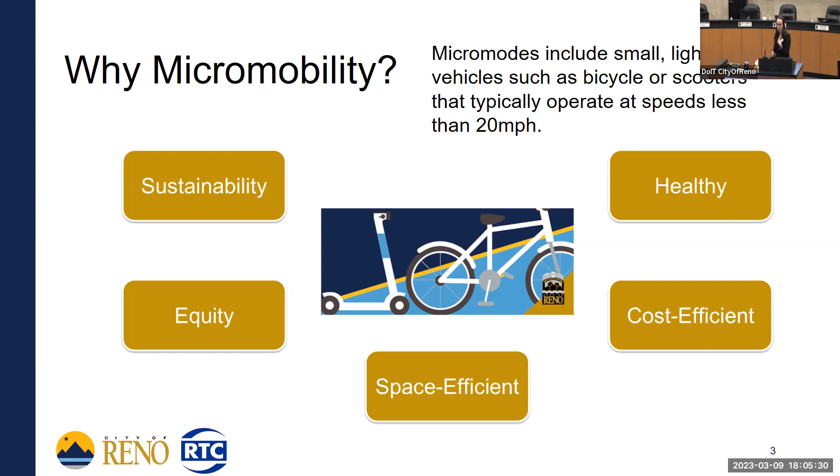Something we know about micromodes is that they're particularly well suited to trips, especially less than 5 miles. And something we know in our region is that there's over 570,000 daily trips less than 5 miles. From other cities who have implemented a high level of bicycle infrastructure, we know that a 5% mode share capture is reasonable. If we take 5% of those 570,000 vehicles, we get around 28,000 vehicles per day. To put that in perspective, that's as many vehicles as our most used spaghetti bowl ramps. It's a really significant number of trips.

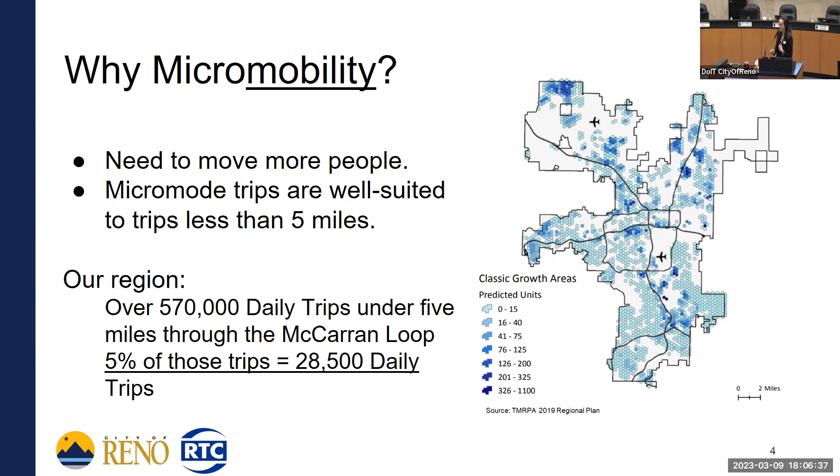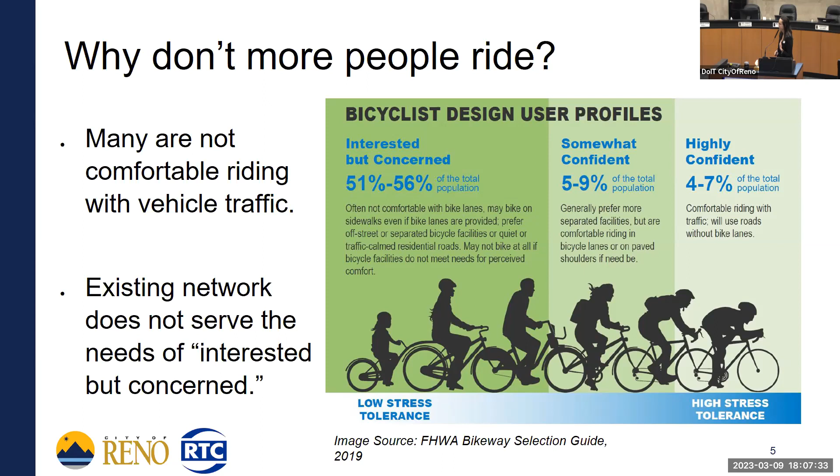Knowing this, we know a lot of our network requires bicyclists and scooter riders to ride with vehicle traffic, so our existing network doesn't really serve this largest portion of the population. So how do we redesign our streets to attract those interested but concerned people? It comes down to providing separation from traffic, especially higher volumes and higher speeds. It's also important to reduce conflicts at intersections so each mode can make movements without conflicting with each other, and to have a continuous, connected route to where you want to go.

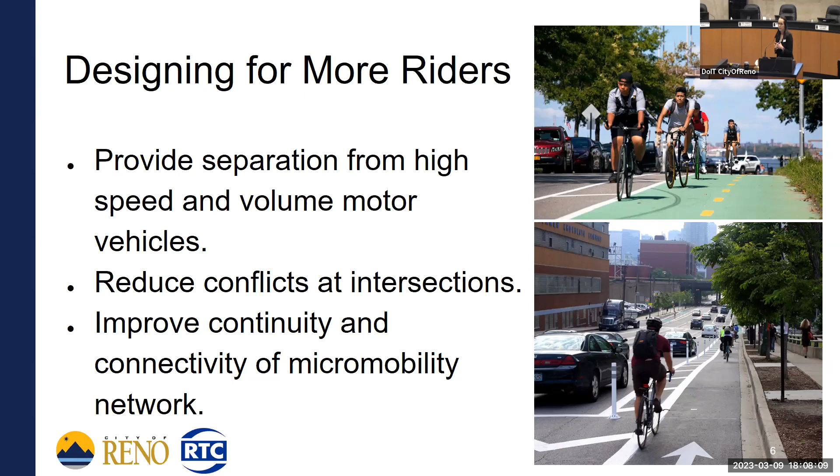This was really reiterated by some community workshops happening around the same time as the pilot project, including the League of American Bicyclists Bicycle Friendly America workshop. Local agency staff and the public participated in both workshops, one hosted by the UNR Bicycle Working Group and the other by the Truckee Meadows Bicycle Alliance. These really reiterated the need to provide a higher level of separation in environments of higher vehicle speeds and higher traffic, and also to improve continuity and connectivity in the overall network.

So it sounds pretty easy, but there are actually a lot of implementation challenges. Our major arterials are experiencing growth in traffic, and these are also arterials that are right-of-way constrained, so adding more things to those roads is really challenging. We also have limited resources and a need to prioritize those resources across the region. Also, many of the micromobility-specific features we can use in infrastructure haven't been implemented in our region, so they're very new to the public. That's something I'll talk about in the pilot project in a few minutes.

But opportunities do exist. For all of these high speed, high volume arterials, we have adjacent streets that have excess capacity and don't have the same traffic volume growth, mostly because they're not freeway connected. There's also really great public interest in micromobility, and we see that again and again in our public outreach.

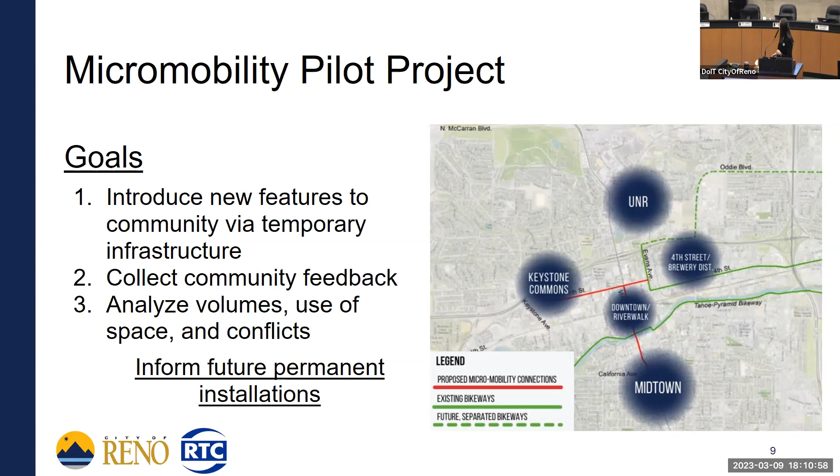The first one I'll talk about is buffered lanes. You might also hear these referred to as separated bicycle lanes or protected bicycle lanes. On the pilot project, these were tested in a few variations: just with a painted buffer, with a raised barrier—mostly candlesticks—with a temporary barrier, and also with a parking-protected barrier. That means we flipped the standard bike lane cross section, where bicyclists normally ride adjacent to traffic, so the bicycle lane was on the curb side and the parking lane was adjacent to traffic.

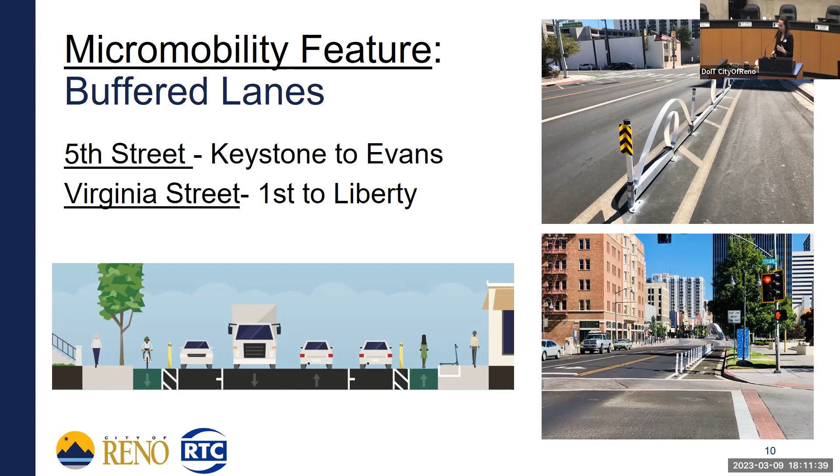Next, we tested the two-way track, implemented on Virginia Street from 5th to 2nd Street. A two-way track has two-way bicycle and scooter traffic in one facility. Instead of riding with traffic in each direction, we reduced Virginia Street down to one way and used that extra space to provide two-way traffic for bicycle and scooter movements.

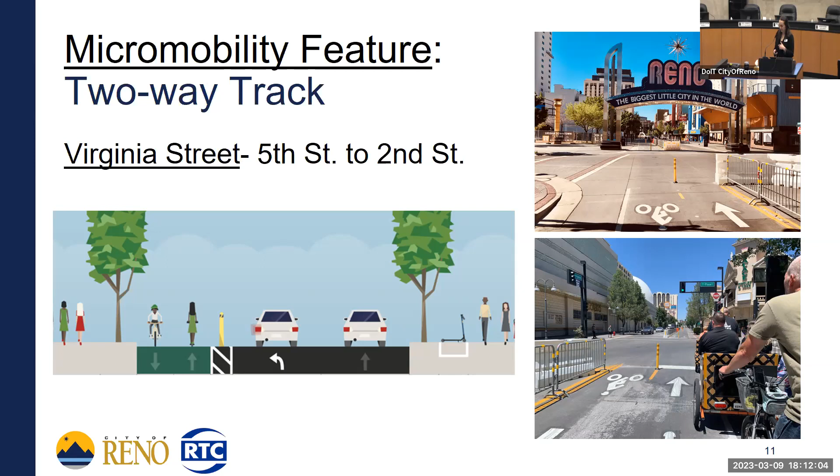Intersections are particularly challenging when integrating bicycle facilities, so one feature we can use is called a protected intersection. The main focus of this feature is that it provides an advanced stop bar for micromobility users so that drivers are able to see them at the intersection for better visibility. It also allows cyclists to do a two-stage left turn, so they can make vehicle movements at the intersection without mixing with vehicle traffic.

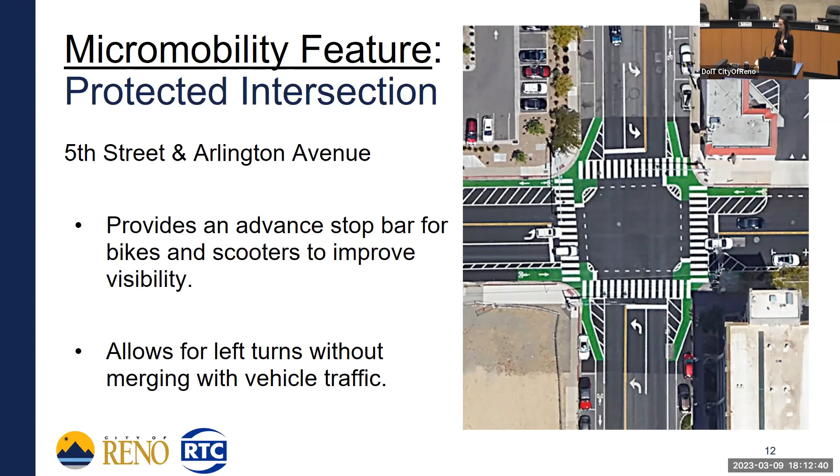The next feature we also tested was bicycle boxes, which, similar to the protected intersection, put cyclists right in front of the intersection to improve visibility.

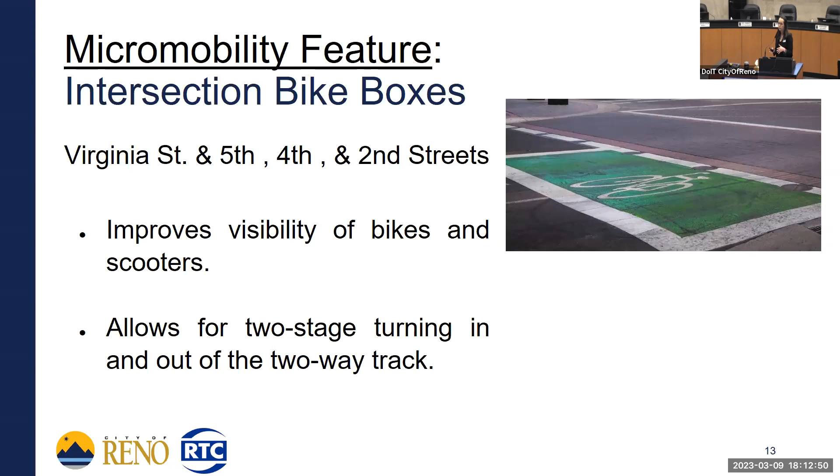Finally, we also tested bicycle signals, which provide a dedicated bicycle phase for micromobility users that stops all vehicle traffic so there are no conflicting movements happening together.

I'm going to pass it back to Katie to talk a little bit about the outcomes of the LiDAR study and the public survey that was conducted.

Yes, we're about the same height.

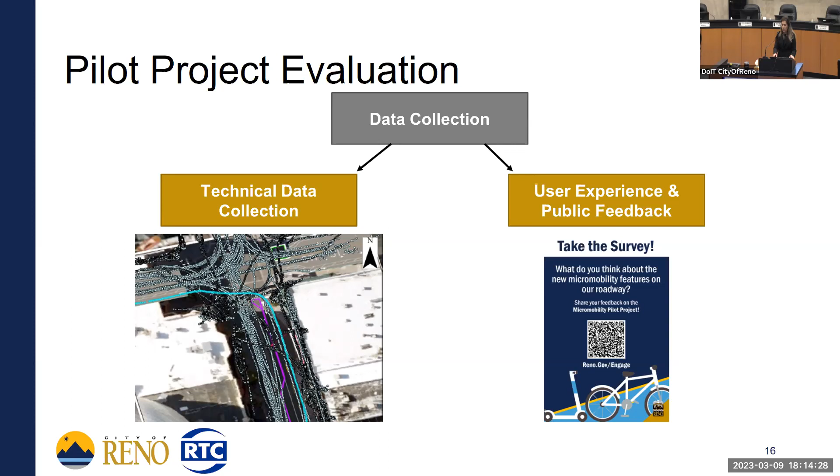This slide shows the two types of data that were collected throughout the pilot project. First, we collected technical data using LiDAR, which I'll discuss in the next couple of slides. We also collected user feedback and experience data through an online survey, which allowed us to gauge feedback both on specific features and the project as a whole.

We're very fortunate to live in a community that has world-class researchers up at the university, and the RTC partnered with UNR's Center for Advanced Transportation Research Group on a LiDAR-assisted study of the project. LiDAR stands for Light Detection and Ranging, and it allows us to collect data on the volumes, speeds, and locations of users within the street or sidewalk space, and also to visualize conflicts between those different users.

We collected data at 9 sites throughout the pilot project over 3 separate rounds in May, June, and September. Round 1 data was collected before the features were installed to give us a baseline. Rounds 2 and 3 were collected after the features were implemented, and round 3 was after UNR was back in session.

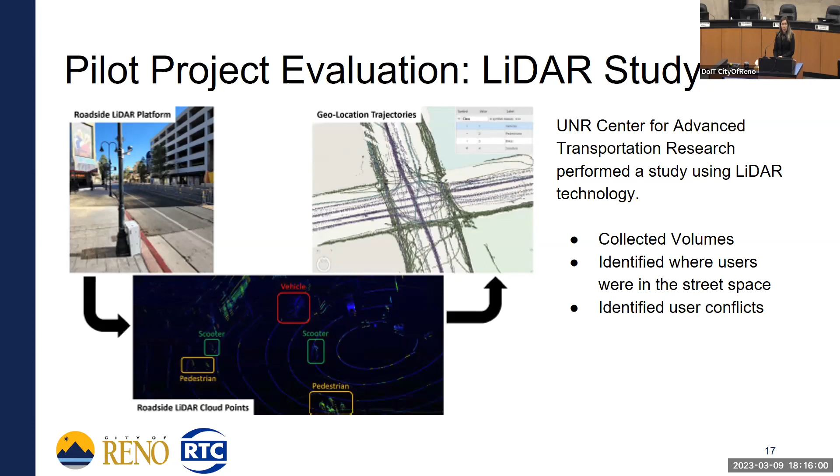We'll present the results of this data, and we'll keep it pretty high level for this presentation due to time. But for all you data geeks out there, the final LiDAR report from UNR breaks it out by intersection, by user type - really gets into the weeds if that's something that you're interested in reviewing.

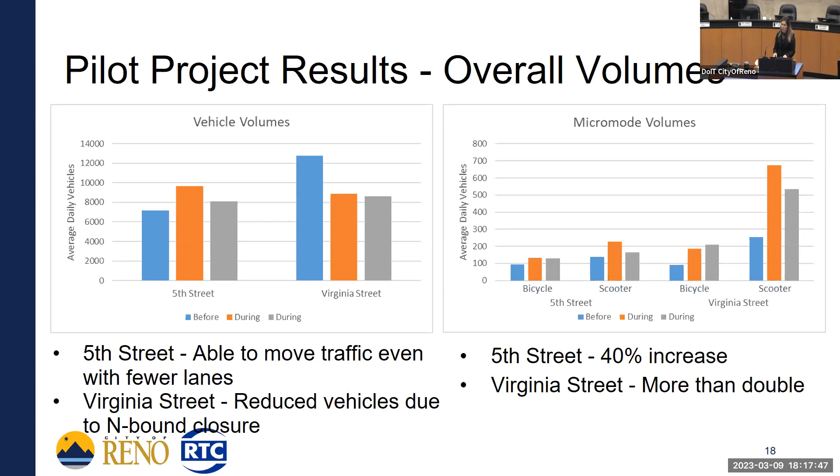The graph on the left shows the automobile volumes. I want to note that on 5th Street, we reduced the number of through lanes from 2 lanes in each direction to 1 lane in each direction. But the automobile volumes actually increased after the features were implemented, which indicates the excess capacity that Sarah was talking about - that we were able to still move the vehicles effectively. The reduction in vehicle volumes shown in the Virginia piece was due to the removal of northbound vehicle traffic during the pilot project. On the right-hand side for micromodes, both bike and scooter volumes increased with the installation of the pilot project features. On 5th Street, the micromodes increased by approximately 40%, and on Virginia, they more than doubled.

Next, we're on to the micromobility behavior, or basically where bikes and scooters are riding within the roadway section. Again, blue is before, orange and gray is after. So what are we seeing here?

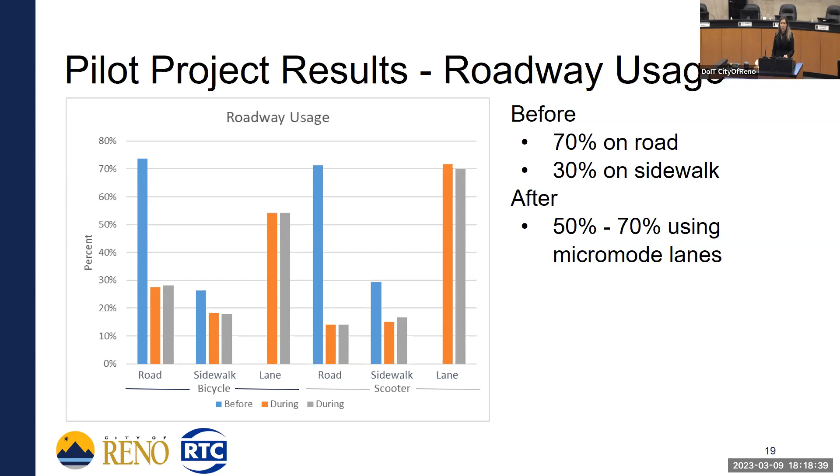Before the project, roughly 70% of bikes and scooters were riding on the roadway, and the remaining roughly 30% were riding on the sidewalk. After the installation, you can see there's no blue in the lane for round 1 because those lanes hadn't been implemented yet. But after installation of those lanes, roughly half of bikes were using the lanes, and 70% of scooters. If you look at 5th Street specifically, that increased for scooters to 80% utilizing those micromode lanes.

Now we looked at conflicts between users next. And I really want to emphasize conflicts do not equal crashes. The study identified a conflict as any time two different roadway users were in the same space within two seconds of each other. So if I'm walking across the street and I'm at one spot in the road and a car passes that same place within two seconds of me, that would have been counted as a conflict.

We also looked at conflict rate rather than the total number of conflicts because it provides a more effective comparison when there's large variations in the number of users.

And I promise only one more graph for you to bear with me, and I'm going to grab some water.

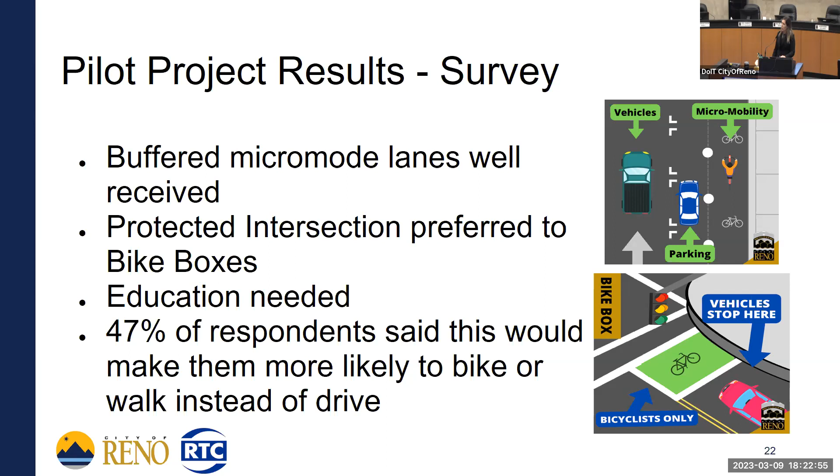So to summarize, adding this type of infrastructure increased the number of micromode users through those corridors, and it also decreased the conflict rates for all of the roadway users, not just micromodes. We gained valuable feedback from the community on the items that were working and the items that weren't working as they were installed, and this will help us inform future installations.

And we know education is critical, and that's something that will continue as we build the multimodal network in the region. So what happens next? I think that's probably a big reason why a lot of you are here. This project helped us evaluate the tools in the toolbox. So now we're looking at how do we apply these tools and what we've learned on projects moving forward.

First, the city's in the final public engagement stages of the Virginia placemaking study. I know a lot of you were here a couple of weeks ago for that engagement session, and the recommendations presented by Gail at that included micromobility features.

Also, the City of Reno and the RTC are working closely on some funding that was allocated to purchase additional path sweepers. We know that's a big component to this type of network, is maintenance. And also Truckee River Path repairs. We know the Truckee River Path is a critical east-west corridor throughout our region, and there's definitely some sections that need some love. So we're prioritizing some of those repairs coming in the spring and early summer.

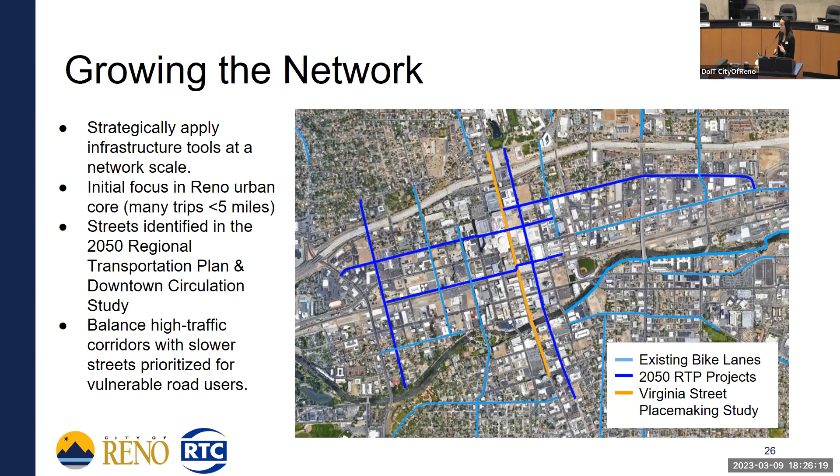These streets were identified in the Reno Downtown Circulation Study, which was included in the RTP process. And the methodology behind the selection of these streets is to balance those high speed, high volume vehicle corridors with slower speed streets that are more designed for vulnerable road users. So bicyclists and pedestrians in particular are considered vulnerable road users.

How do we move that forward? Next steps, we're looking to develop some more concepts for these streets so we can get an idea of the trade-offs on these streets, what kind of impacts there will be, what kind of cross sections we can look at, and the overall cost of those projects.

And we're also, like Katie mentioned before, going to take this micromobility pilot project presentation to the Reno City Council and also the RTC board. So after we've developed some concepts, we want to bring them back to the public.

In the May timeframe, around the time we're starting our active transportation plan, we'll be looking more broadly at the region. And then later on this summer, we will also take those concepts back to the RTC board and the Reno City Council, which are our directing bodies.

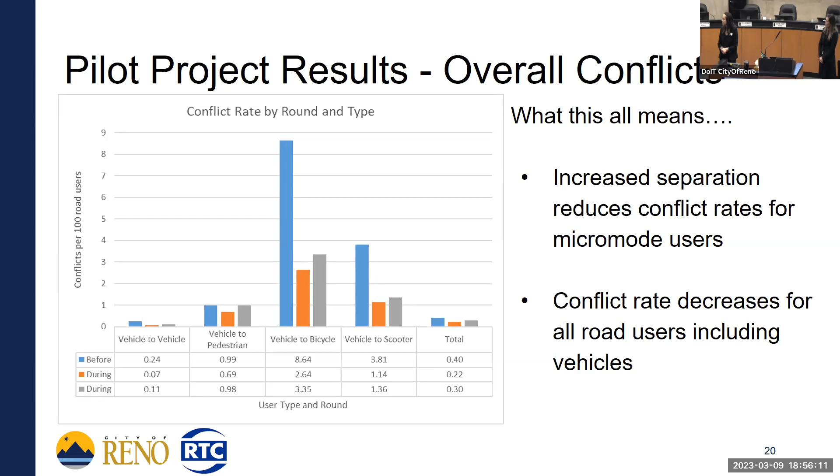Yeah, I'll see if I can wrap all these questions because they really are interconnected. And I did ask a few of them last week online, and they really didn't get answered. I'm glad the RTC is here. Just to start out, just to give an idea, the snapshot for whatever they did on the study, I think we said it was about 5%.

They said the traffic disruption about having bicycles on Virginia Street are going to be great. Now, what has changed within that? Now, I realize that this is probably a foregone conclusion because everything was going on Center Street until a certain letter was sent by a certain casino company that disrupted everything. You guys were 30% complete on the bicycle micromobilities on Center Street. So I'd like to know what's changed in these, because it sounds to me like the traffic's going to be horrible and bicyclists are going to be in danger by trying to stuff them on Virginia Street.